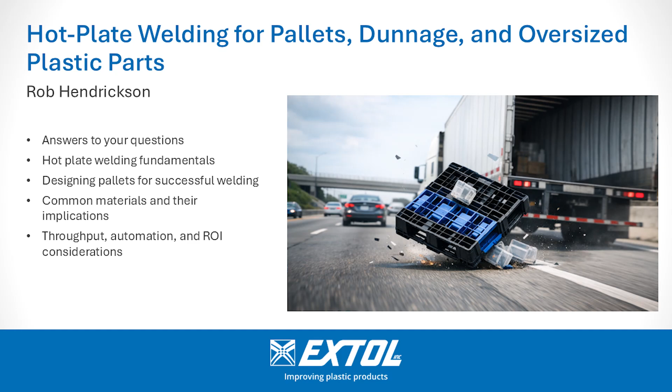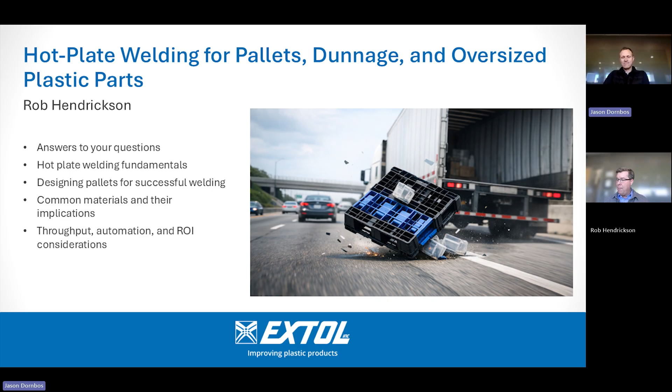So first question was, why did you sign up? Second question was, what type of pallets or dunnage or totes do you deal with? This one, maybe A, B, C, D, E, F, if you want to answer this one.

What kind of manufacturing process do you use to make pallets? There's a lot of different ones out there. Generally, like a single shot injection mold, there may not be welding on that. There may be, but maybe in a specific application.

There's the two-shot injection mold, which we're going to talk quite a bit about because that's primarily what we do when you see the most volume. We've been seeing a little bit of growth in the area of twin thermoformed sheets because I think they offer a little bit more impact resistance when dealing with that. The thing is, they don't always offer the opportunity to have a raised rib for you to weld on.

We also look at an injection molded base with an extruded top, and maybe you're doing some hot plate welding, maybe something else. Please let us know if you have something there. Otherwise, we're going to try to run the gamut and cover those things.

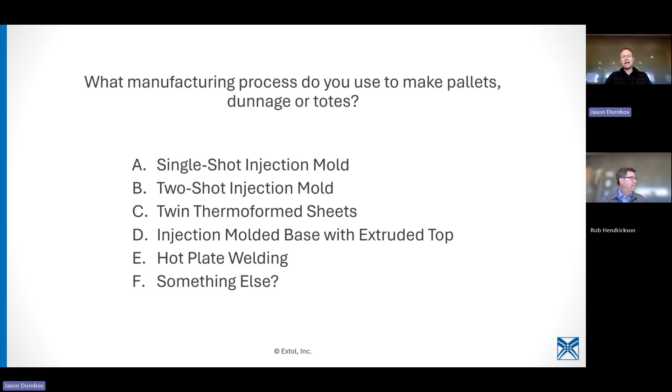Sounds great. So I'd like to talk a little bit about why Extol. When you look at plastic welding, that's our sole focus, right? Plastic welding and joining, and we'll talk about that. Comes in a couple different shapes and forms. We'll also talk about what that looks like when we discuss those different applications that we've looked at.

There's pallet welding, which is that two-piece injection molded piece that we look at. We've done bin extension, so when you have a bin and you want to add some height to that, there's also been pallet extension. We've looked at some bin extensions on a lateral approach too, but then there's also tote reinforcement. So sometimes you may have a standard tote that you're making and you want to reinforce that bottom because it's got heavier materials being transported in it. That's another way we look at welding for those different types.

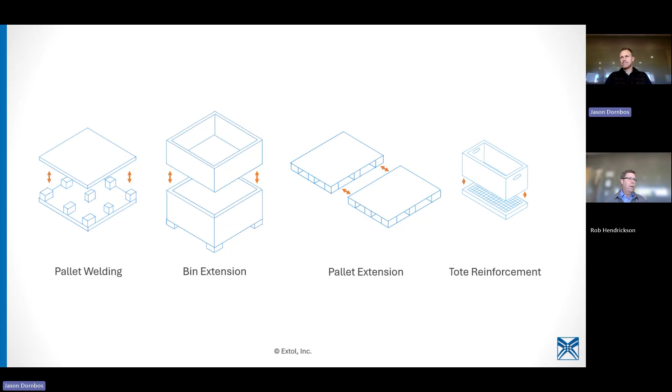And you might have something else that you've got, so I encourage you to talk about that. Again, as I said, Extol solves complex plastic manufacturing challenges, and that X in the logo on the side talks a little bit about our approach. We really focus on plastic welding expertise. At the core, that's what we do.

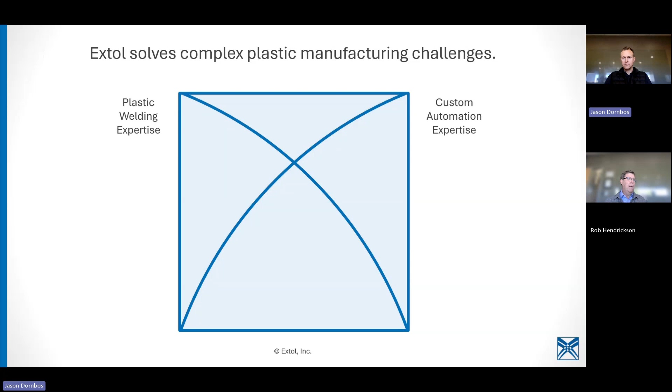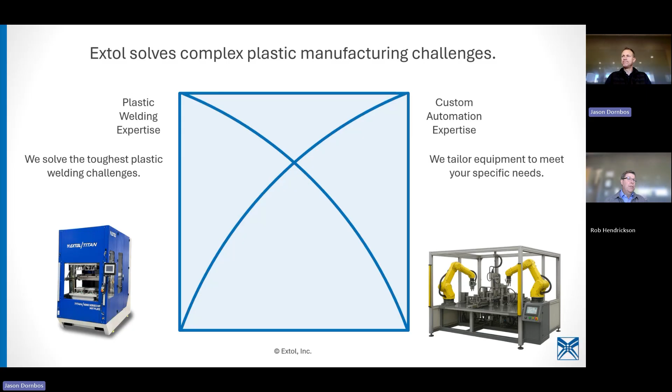We also have expertise when it comes to custom automation, but really the value you get is we've got a standard piece of equipment. When we need to solve those tough plastic challenges, we've probably got a piece of equipment and we've definitely got a process that we can take you through to figure that out. When you look at equipment, we can custom tailor that equipment if it doesn't fit inside a standard hot plate welder like this one here on the left. So we can do that piece. Really what Extol does is we don't make you compromise, right? We give you the best of both worlds when we're working with that. And our approach is kind of threefold.

We got a quick question from Ted: can heat welding create an airtight or watertight barrier? Great question, absolutely. A lot of different welding methods can create a hermetic seal, something that's airtight or watertight. And hot plate welding is definitely one of those.

So we'll quickly talk through some of these areas that Extol specializes in. Our engineering services group, think of us like an extension of your engineering team. We can help you with development. We can kind of guide you through the process of adopting plastic welding into your manufacturing processes.

So we can help you with prototyping, validation. We'll do a design of experiments, whatever you need, and we'll guide you through that process.

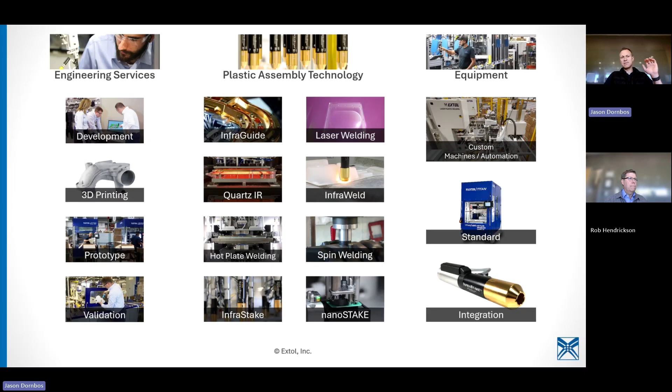I'm going to quickly touch on the different plastic assembly technologies we offer. They split into two categories: welding technologies and staking technologies. Welding means taking two plastic materials and getting them to bond at the molecular level. Staking is a mechanical joint, where we heat a post and form it to capture some mating component. It's mechanical retention, so it doesn't require material compatibility. You can stake plastic to something other than plastic, like metal, paper, leather, or printed circuit boards.

But today we're really going to focus mostly on welding. I'll quickly give a high level overview of some of these different technologies.

A few of them use infrared energy. InfraGuide is focused infrared energy. Quartz IR is a more broad-based infrared, where we take a mask to block off areas of a part where we don't want heat. Laser welding is a very focused single wavelength of infrared energy that we trace around a part to get the weld. InfraWeld is a focused spot weld that does through-transmission with IR.

The main focus of today would be hot plate welding. Essentially, you have a heated tool and you're touching plastic to that. The last one I glossed over is spin welding: you spin one component relative to the other, apply pressure, and the friction of that spinning motion causes the plastic to heat up.

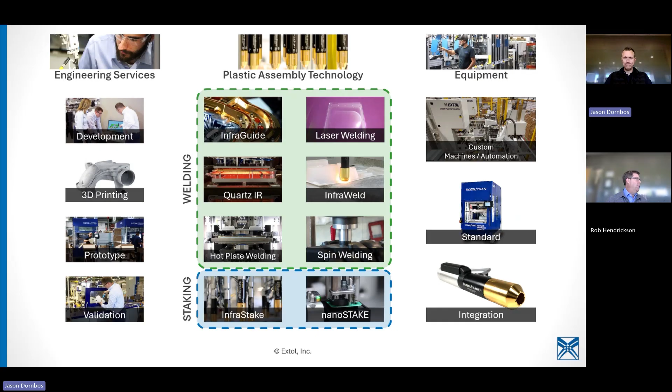So we're going to talk a little bit about hot plate welding, starting right there. We'll cover what it is, how it works, what the benefits are, where it's used, how to design for it, and what the equipment looks like. Then we'll talk about how some of the other technologies can operate in that same equipment and why we might use those as an alternative.

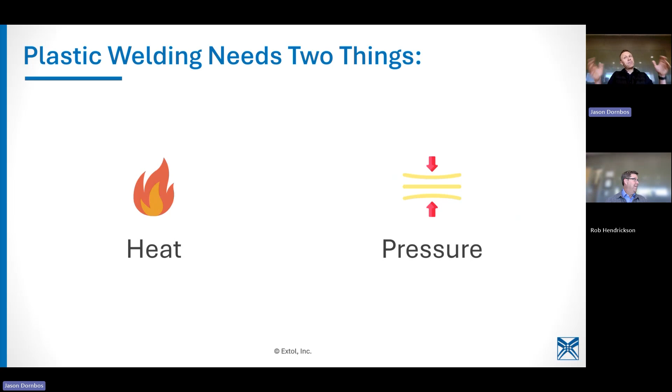So plastic welding — pretty simple, you need two things: heat and pressure. That's it. There are lots of different ways to apply that, as we saw in the overview of the different welding technologies, but it comes down to heat and pressure. So what is hot plate welding?

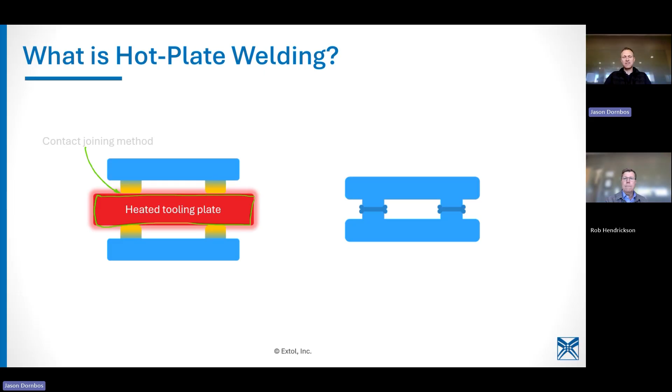It's a contact joining method — we're actually touching the plastic to a heated tool. Here's your heated tooling plate, represented by that little red rectangle. It's hot, and we can control the temperature. When we touch onto it, conduction from the heated tool goes into the plastic parts. Once things are heated up sufficiently and you bring them together, you get strong, leak-proof welds.

Yes, they are strong, airtight, and watertight. We talked about welding some of those bins—one application was a vertical extension where they were actually putting fluid inside. Absolutely, we can get that to work even in that large scale type of application. If you put a bunch of fluid inside a Dunnage-sized bin, there's a lot of pressure involved, so it's got to be able to hold a lot of pressure.

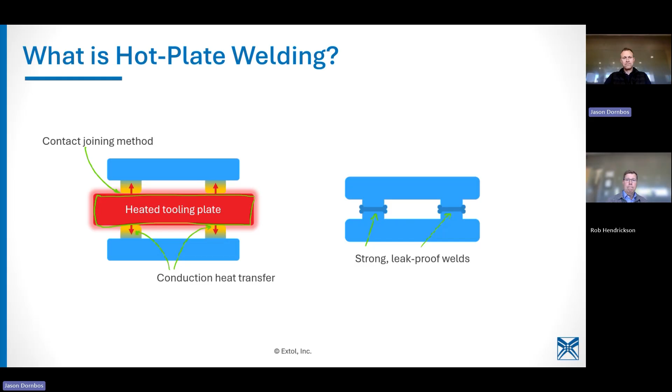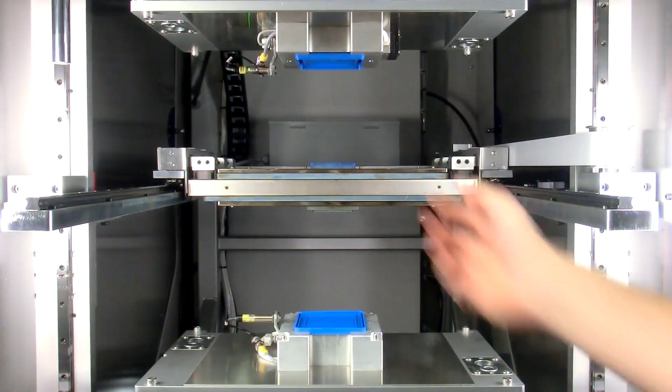Here's a quick video showing what the hot plate welding process looks like. This isn't a pallet, much smaller than a pallet, but it illustrates the process. This is a polypropylene part. The heated tool is probably around 800 degrees Fahrenheit, giving a quick melt time because of the high temperature. Then this is the seal phase, where we push those plastic parts together to get a bond.

I saw somebody start typing. Did you have a question? Feel free to ask it whenever you'd like.

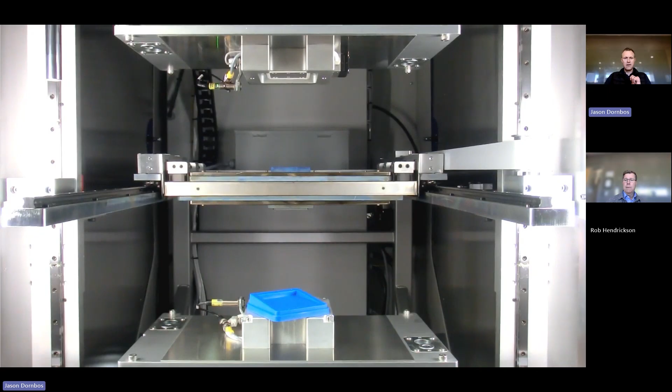How can you ensure the weld will hold up to impact from pallet jacks? That's a good question. What we typically do is tensile testing, to make sure the weld is really, really strong. With hot plate welding, you can typically expect anywhere between 80 to 100% strength in the joint, compared to the parent molded material.

Often we have people design the weld rib width to be a bit wider than the wall thickness of the rest of the part. That way, if your weld strength is more in the 90 to 95% range, the extra thickness in the rib gets you to 100% strength. So if the wall thickness is strong enough to survive the impact, the weld joint should be too. Most of the time when we do strength testing on plastic welded parts, the joint doesn't fail—somewhere else on the part breaks apart, the parent material.

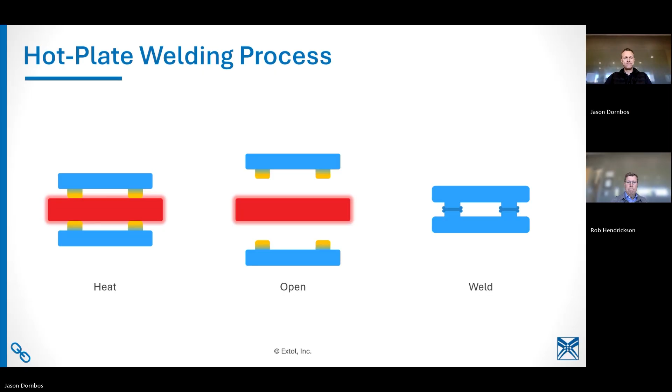Here's a quick overview of the hot plate welding process. Like we saw in the previous video, you apply heat by touching the plastic to the tool. There's an open phase in between where the heated tool gets out of the way, and then a weld phase, sometimes called the seal phase, where we bring the parts together, applying controlled pressure to get them to bond. Then that's the cooling phase—get it in contact, let it start to cool, and then move on.

There are lots of different parameters here, but some of the main ones are controlling the temperature, the depth, and how long you're in contact with the heated tool—that affects how much heat you're putting in. Then there's the seal or weld phase, where we control the depth, how far we're pushing the parts into each other, the forces used, and how long we're holding it. Those are the pressure parameters that matter most.

I see Mike typing. I don't want to jump too far ahead—he's got a long one, this could be a long question. That's good, we'll let him keep typing.

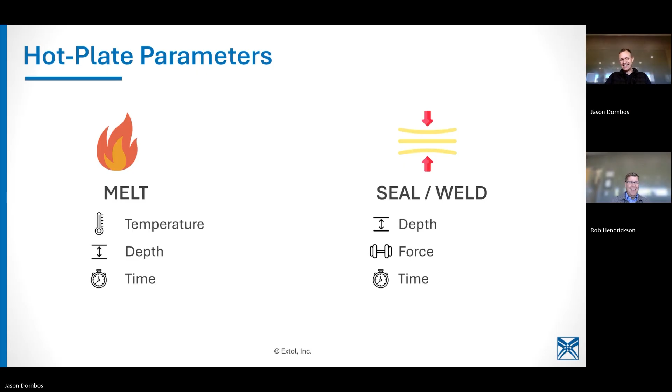Benefits of hot plate welding: welds are strong, as we discussed, you can get basically parent material strength. It's leak proof, so it'll hold water, air, and lots of other fluids—doesn't have to be water. It's also free of particulate. Other processes that join plastic parts, usually friction-based ones, can generate particulate—plastic fibers and loose particles coming off the weld joint. That's not an issue for some applications, but in others you need a cleaner assembly, and particulate is a bad thing. Hot plate welding doesn't have any particulate.

Generally speaking, because of the molecular exchange that's happening, hot plate welding is really the strongest weld you can get. Yeah, it really is a very strong, robust weld.

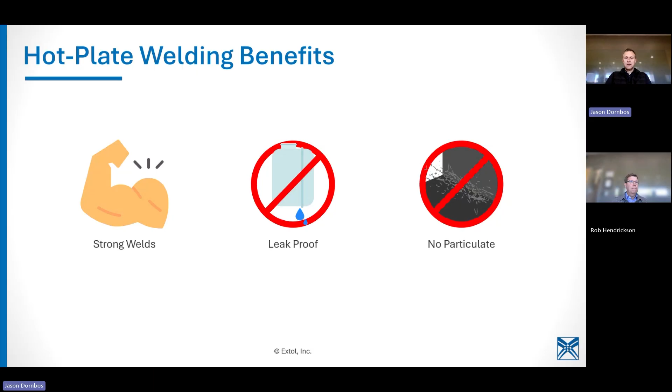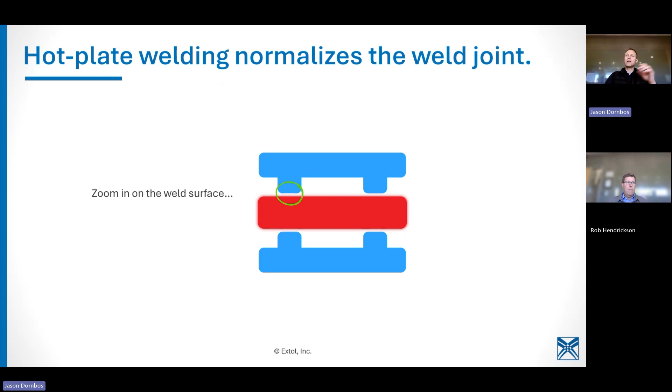One of my favorite things about hot plate welding is that it normalizes the weld joint. This explains why we're able to get strong parts and hermetically sealed joints. If you look close at a plastic joint or part, they aren't actually flat. There's always warp or inconsistencies that deviate from the designed part in CAD. So how do we deal with that?

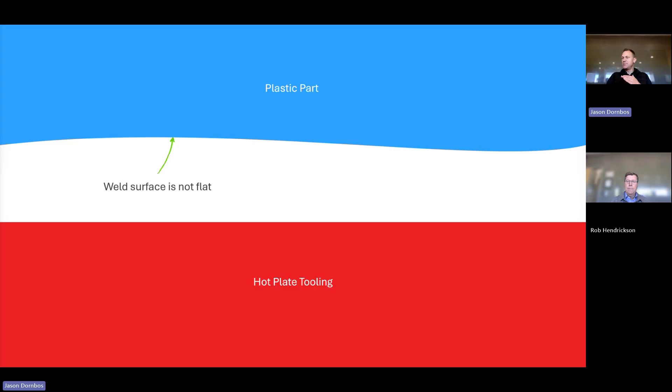The hot plate tooling can be machined to be very flat. So in hot plate welding, you use the hot tooling to normalize or flatten the weld surface, on both sides. What you end up with are two parallel surfaces that are flat and ready to be joined. There's no high spots, no low spots. So when we bring these two surfaces together, the pressure applied to the joint is evenly distributed along the entire weld surface, so you're getting strength everywhere and leak proof everywhere.

Mike has a question there. You want to take that one, Jason?

Is there a way to simulate via FEA or similar process the rackable strength load carrying ability of a welded pallet? There might be, but I'm not sure exactly how you'd go about doing that. I think you'd have to make some assumptions as to what kind of strength the actual joint is seeing.

That's a good question, Mike. I'm not quite sure the answer. I know we have not done FEA on a welded pallet. We do some estimates of strength, then I usually apply a safety factor, and we back that up with testing parts, actually physically welding them and doing tensile weld tests. We take a segment of that and do a tensile test on it to give an idea of what that strength is. But I don't know that we've done that specifically for rackable strength.

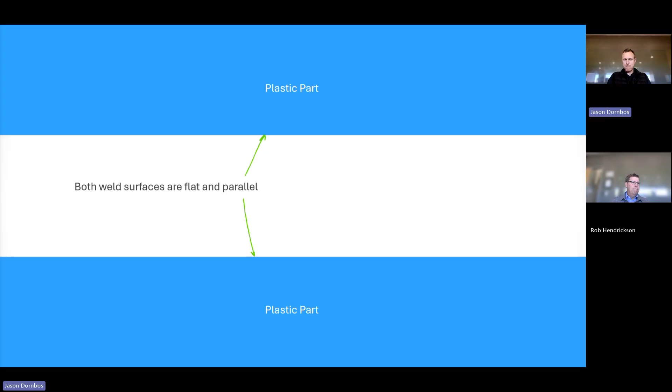Wait for him to type. He's typing. Good, well keep going here, Jason. We'll pause. He's got our attention. You got our attention, Mike. Bring it on, love the questions.

Agreed on the rod insertion, just wanting to avoid this if possible. Well, what I can say is welding plastic parts will never increase beyond the strength of the original material. You can't get 105% parent material strength, you can only get 100%, that's the max. So if plastic is going to bow under the weight of the load of whatever's inside it, you've reached the limit of what the plastic can do, and then you've got to do some other reinforcement, whether that's more plastic reinforcement ribs inside, or inserting other materials that are better at bend strength.

I can also understand your point on the rod insertion and wanting to avoid that, because down the road it does affect the way you can regrind that pallet if you want to make that more sustainable. You've got to disassemble first, and it's hard to disassemble those, they're kind of complicated.

Great question, Mike, thanks very much for that one. Common materials we're looking at are really polypro and HDPE. Sometimes people put fillers in that, with glass or talc, but we've done both of those. We'll talk a little bit later about temperatures too. With polypropylene, you could go with a little bit higher temperature, but when you're dealing with HDPE, you're really going to have a Teflon coated tool. People don't like to necessarily coat the tools with Teflon, but you've got to approach it at a lower temperature, and you've also got to worry about a little stickiness with that.

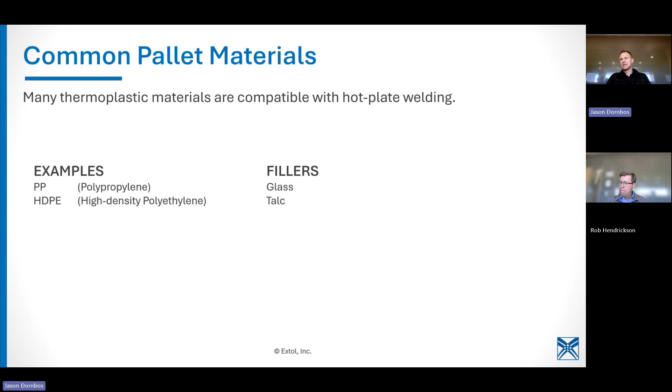I'm curious if there's any materials that I'm not familiar with, maybe Rob's familiar with, that you're using in your plastic pallets that are not polypropylene or HDPE.

Let us know. This is a good way to talk about hot plate welding and how this works and the transfer of energy in the various phases. But we're also going to talk a little bit about IR and the differences between them.

Jason, let's talk about this here. One of the biggest differences between using hot plate welding and IR welding is material displacement - how much material do you need in your weld joint or in your plastic that's going to get moved out of the way?

So with hot plate, when you reach the melt phase, we're displacing some of that material - we're melting some of it away. What you see on the screen in orange, if you look at this area, the little yellow area is showing that material was there, but now it's been pushed out of the way by the heated tool. You'd get like a little ball of plastic on either side of the weld rib.

Then you go to the open phase, that shaded yellow area still not there in the joint, and then you come together in the weld phase, and now we're squeezing out even more material. So the total displacement here is a fairly significant portion. For something like a pallet, you're probably going to displace 2-3 millimeters, maybe more, of material just because it's a large part.

And as we talked about, with hot plate you're normalizing that weld surface. So if you've got a lot of inconsistencies in the surface of your part, we have to melt all of those away, and so we get a lot of displacement to achieve an even total melt on the whole surface.

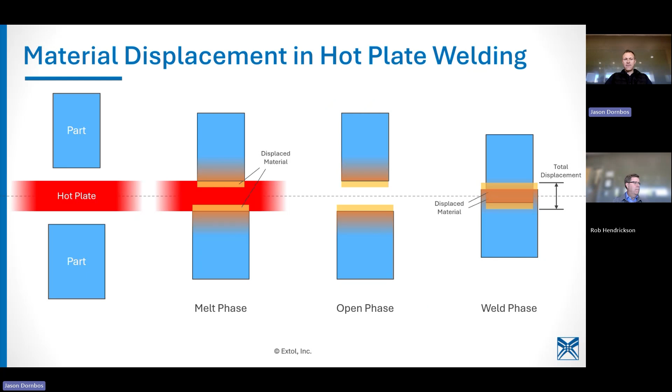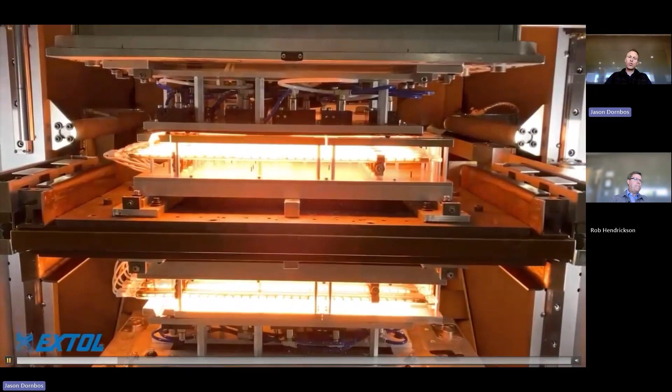So how does that differ from IR? Let's quick show a video of what infrared welding looks like. So you can kind of see, once it lights up, you can see there's all these quartz bulbs that are emitting that infrared energy.

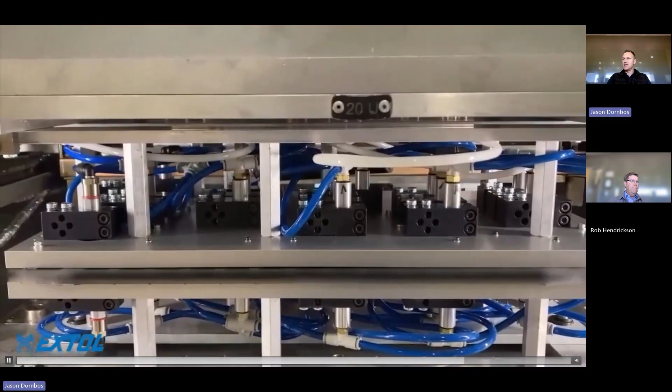And then in the middle here, this area, that is the mask. That is a piece of tooling that is designed to block some of the infrared energy from getting to the plastic part. That way we try to direct it on that weld rib. Exactly. And this is blurred out for customer confidentiality, but you can imagine what that would look like on your pallet.

So Jason, why would somebody want to go to an IR option instead of a hot plate option? There's two main reasons I could see. One is you're trying to reduce the amount of displacement, the amount of material that you're displacing. But the second reason, and maybe the bigger reason, is sticking issues. If you're having trouble with the plastic from your pallet sticking to a heated tool, then the best way to get rid of that is to not touch it with a heated tool.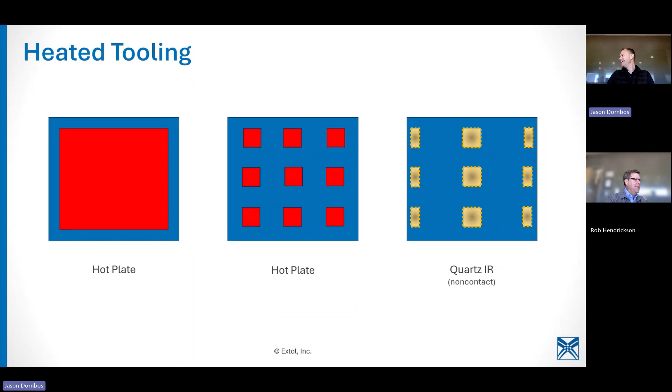In hot plate welding, the one on the far left where the whole surface is a hot plate, a hot tool, that's doable. If you were to do a pallet-sized quartz IR for something like that, you'd have to call your local power company and say, I need a new power generator right next to our building. And we'd introduce you to some of our friends in the energy storage industry.

Good question. And it looks like Ted's got another one coming up, but let's keep moving here because we're at 11:25. We promised these people they could have their lives back at 11:45. Yes, we've got 20 minutes to get through this.

All right, so there's lots of different hot plate welding equipment that Extol produces. We produce anything from small modular welders made for welding smaller components, to our standard Titan series welder. How many of those do we have? Yeah, we've got probably 260 of those that we have sold. That's really where Extol is known for this.

I mean, we've got some of those that have 3 million cycles on them, and they just keep going. And the interchangeability of this, I think with the Titan, one of the things we've done too - this probably applies to some of the tote conversation, Jason - is the way we've designed that is so you could actually easily integrate it. You could do a traditional front load on that with an operator load, or we could move off that front and put it in a manufacturing line with a conveyor coming through to pick up those parts. So it gives us some flexibility.

And then the jumbo is really when people came to us and said, hey, there were some other people making hot plate welders for pallet welding - some European providers, some domestic providers that were really more automation people doing it. And people said, hey, you know about plastic joining, what can you do for us? So we've produced multiples of this. We actually have one in our manufacturing facility right now that we're doing. And they come in a couple different options, and we'll talk about those in a minute.

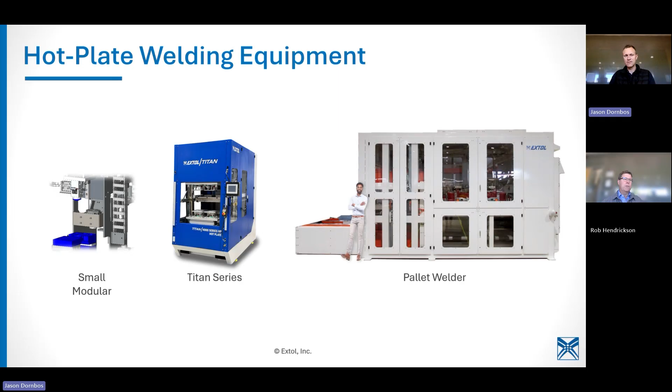This is where Jason's really going to start to geek out. This is where I'm going to nerd out. Graphics and stuff, I like this part. So buckle up, we'll get into this.

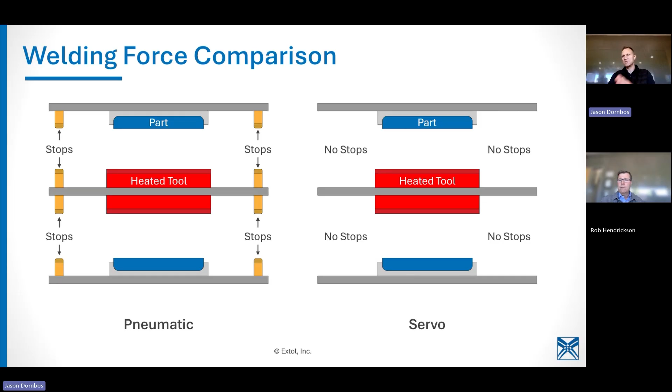With pallet, it says pneumatic, but pneumatic or hydraulic is kind of what we're talking about. I know with the pressures needed for pallet welding, often it's a hydraulic machine. But the main difference here would be: pneumatic and hydraulic welders need hard stops to control the motions of your press. There are stops that you have to mechanically, physically set, and you can adjust the height of those. On a servo welder, there's no stops. So let's look at what happens in your weld process with a welder that has stops versus one that does not. When you come to the melt phase, you have a hard stop to control the height of your part as it presses into the hot tool.

But how do you know that the whole weld surface is melted? With a servo-driven welder, we get feedback from the servo motor that we can calculate forces from. You can put a limit around the amount of force needed to get to your programmed melt position. If that force falls off or goes really high, outside of the window you know gives you good parts, then you know there's an issue. Maybe you have a short shot, or a part that had extra material flashed over on it.

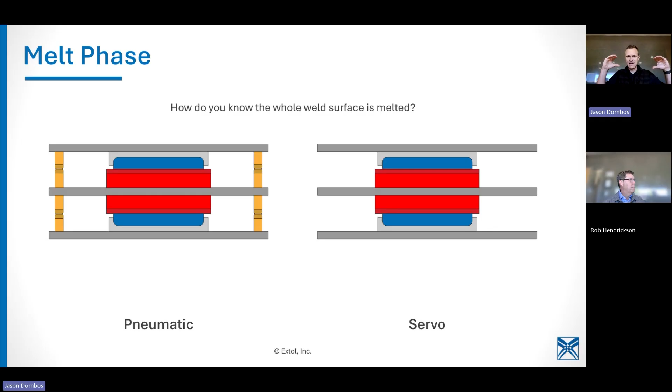Whereas a pneumatic welder, you don't get that feedback. If there's a short shot, it's going to go and hit the hard stops, and then it might not melt all of your part.

Could be a problem. When you go to the open phase, a welder with stops needs to open all the way before you can get your heated tool out of the way. Things move slower in a pneumatic or hydraulic machine. With a servo welder, you can program it to open just slightly, just enough to be safe, and then get that heated tool out of the way quickly because servo motors move fast.

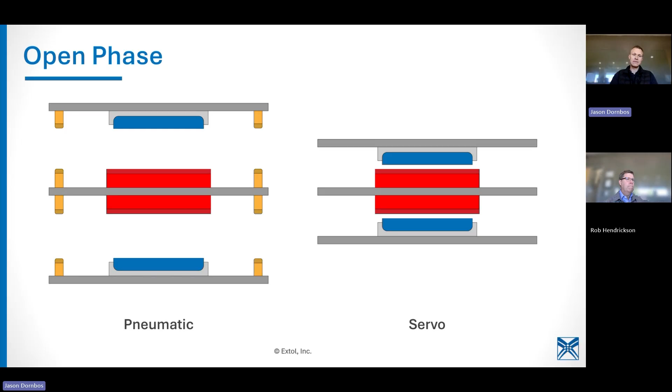And then the weld phase. The question here is how much force is going into the weld joint? As we said earlier, heat and pressure. So how much pressure are you applying to the part? With a welder with stops, you're applying that force, but some of it's going into the weld and some into the hard stops. How much is going into the part? You don't know, there's really no way to know. You're applying force, but if all of that force is going into your hard stops, then the part's not seeing any of it.

With a servo-driven welder, 100% of the force applied by the servo motor goes into the plastic part, so you have control. Are you able to weld parts with a pneumatic or hydraulic welder? Yes. Is it a controlled, easy to understand process? No. But with a servo welder, you can.

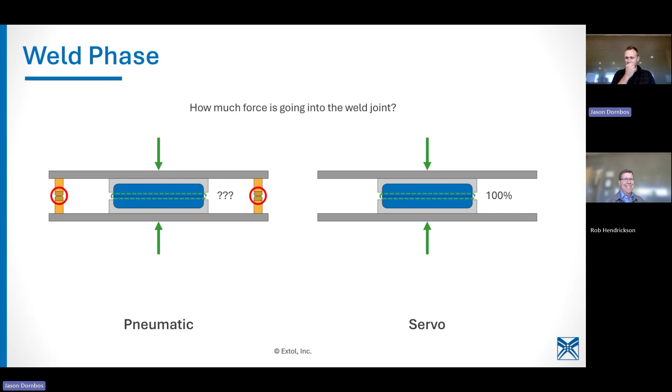So here's the summary. Pneumatic and hydraulic welders use stops. You can use electronic pressure regulators, and it's great for simple, small parts. But with servo, you get no hard stops, precision control, and fast cycle times. It's great for large, complex parts, and it's what we choose to go with for pallet welding.

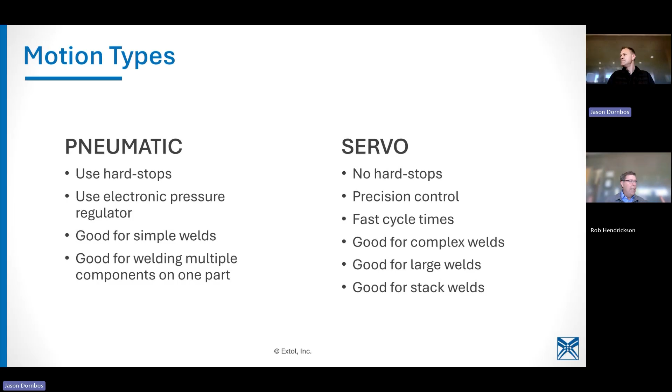And when you look at our pallet welders, it's kind of shocking. As I went out there, I was thinking it really was only 4 servos, but it's actually a 7 servo welder, with primary and secondary servos in it. There are 3 for the horizontal motion, and 4 for the vertical motion. Each of those platens has 2 servos on it, which makes sure you get good, uniform pressure when you're putting those parts together. And we know that's critical to the weld.

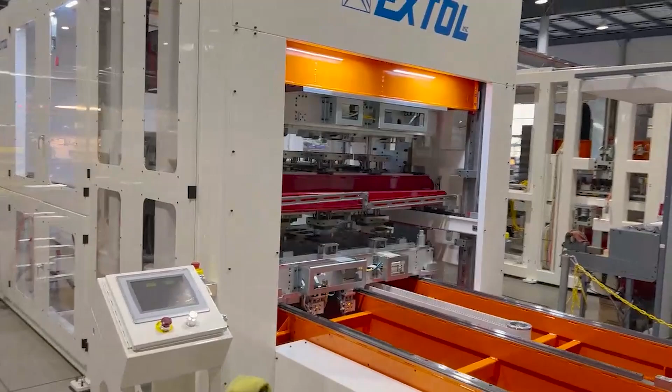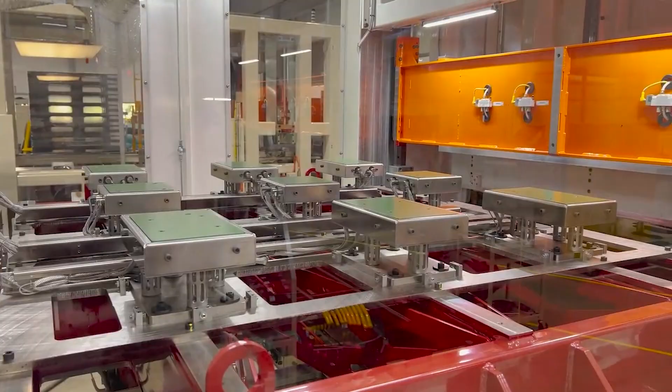So let's keep going here, Jason. Here's a video, we're not showing the part, pallet, spoiler alert, so you can see how it moves around. The video pans around the machine so you get a sense of the scale of it, and then as we pan in here, those are the heated pucks doing the melting on your part.

And so that green is the Teflon right on top of that, right? Yep. So here's a full dry cycle where we're doing a part pickup.

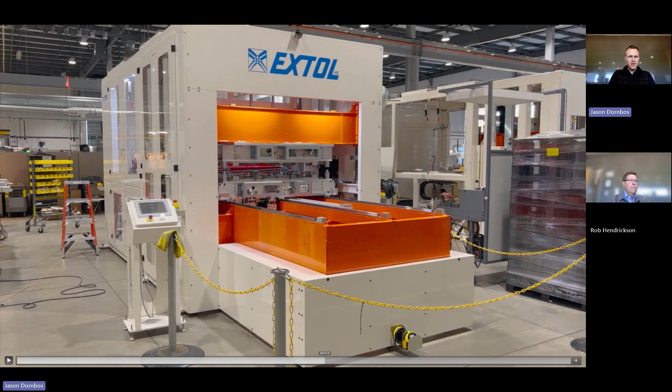So actually, I'm going to pause it real quick and back up. This part's important, that the lower tooling, what this welder was built for, is we're loading onto that lower tooling, and by having it stick out of the machine, it's way easier for reach. Whether you have an operator putting these in, maybe two operators, trying to reach inside of a machine to load a pallet would be really difficult. So this is helpful for either manual load or a robot load where the robot reach can't get inside the machine very well. This is a front load and front unload application.

And then when you're done, that welded pallet comes up the front, as Rob's saying. Okay.

So, yeah, we've done many of these machines. Like I said, we've got over 260 hot plate welders out there in the marketplace. So not just pallet welding, but it is something we do. That's what Extol is.

We're usually running about less than 1% scrap on these. I think that scrap, like Jason said before, usually there's something involved in that, a short shot or something like that.

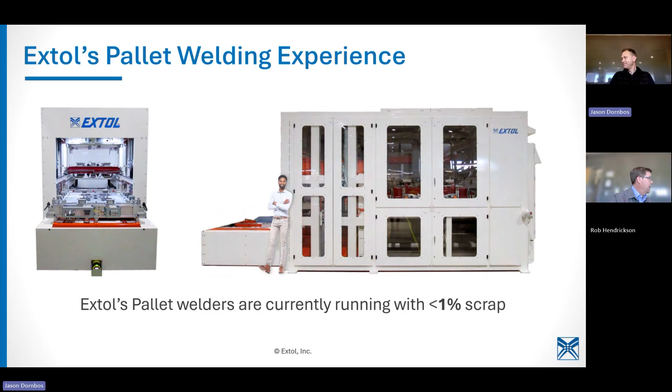But when you look at increased throughput, this is a 4-axis servo system, which is usually what we have on some of those applications. This other one we're going to talk about is a 7-axis. It's going to have a very durable 6x6 steel tubular frame.

We've also designed it with flexibility in mind for changing those tools out. It's got a door that opens at the top. You can actually remove it from the side too, but it's a lot easier just to hook it up to a crane, lift it out the top, and take that back out. So we can configure that for future flexibility.

And you can weld lots of different pallet designs all with one piece of capital equipment.

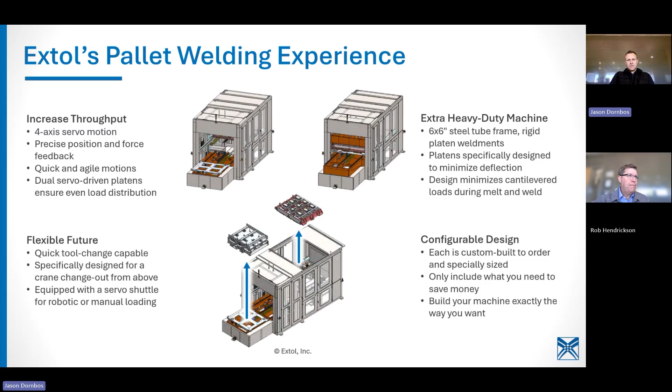Precise process control. With servo, I've touted how much control we have. What we really, really care about, how you tune your weld and optimize it, is heat and pressure. So in the melt and open phases, the melt phase, we're controlling how much heat is going into the weld. The open phase is how much heat we're losing, so we want to minimize that. And then in the seal phase, how much pressure is going into the weld.

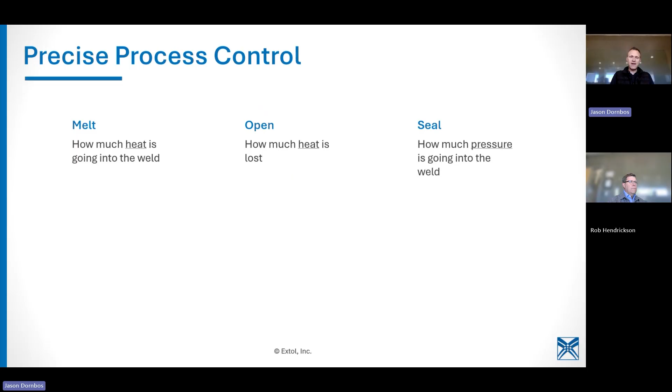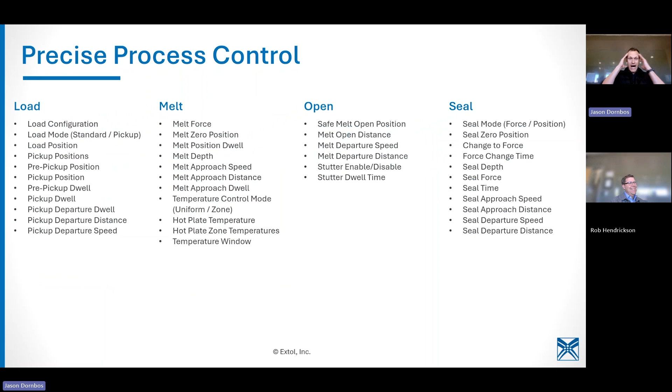So what kind of parameters does Extol's welder give you? A whole bunch of them. I did this because I wanted you to feel a little bit overwhelmed, like wow, that's a lot of parameters. But don't worry, because this doesn't even show them all. There's also pass-fail criteria, little windows of what's good, what's bad, around a lot of these. So you get control over your weld process.

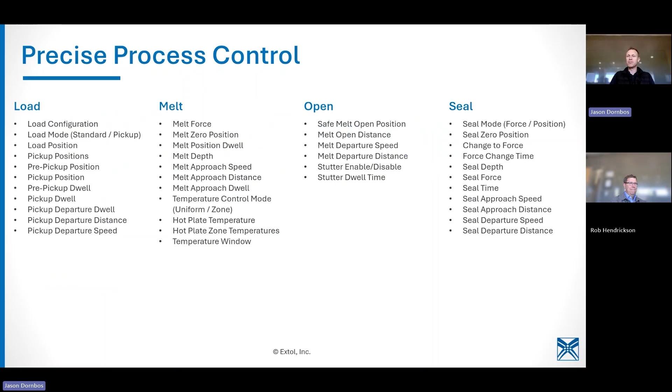But what really matters is a few parameters. These are the ones that actually make a big difference on the strength and quality of your parts. All of these other parameters, yes, need to be set, and of course there's defaults. But Extol, as Rob said, Extol develops the recipe for you.

So you come to Extol to do the runoff on your equipment, and we've got this thing ready to go. We weld parts, and then when we ship it to your facility, we make sure we come down with the machine and make sure it's going to weld parts correctly there. So whether that means you have warm parts from a molding process and we need to tweak some of the parameters, we help you with that.

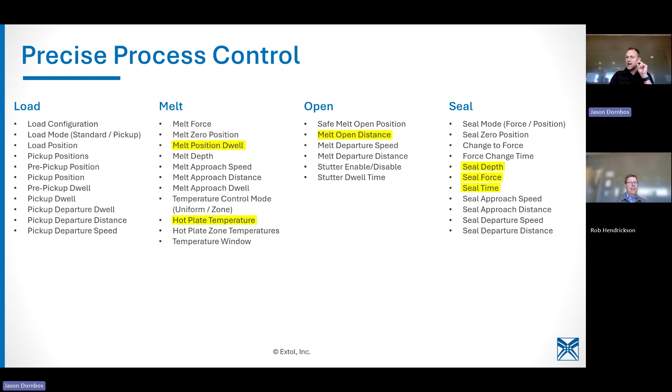So you don't have to get overwhelmed by, oh my goodness, there's a lot of parameters. Yes, there are, but this gives you the control to tweak every single thing that might need to be tweaked. Great summary.

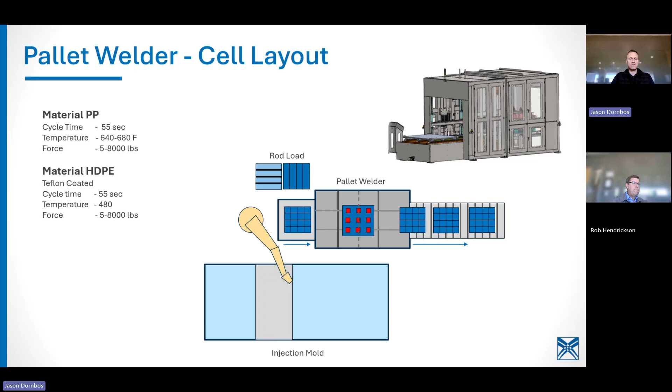Mike asked, what's the most common puck material for polypropylene? Both of these would use typically a steel puck or plate, depending on the configuration. So you're using steel for the actual heated tooling, and then the coating for polypropylene, you can go with Teflon based, but you'd have to limit the amount of temperature because Teflon starts to break down around 550-600 degrees Fahrenheit. If you're going to weld at the elevated temperature, then we would go with more of a chromium-based coating, which is a very hard, robust coating capable of withstanding super elevated temperatures, well above the 680 degrees Fahrenheit that we typically would use.

So one of the other inquiries we've had from people is, hey, we've got a pallet, we'd like to actually extend it horizontally. Well, what can we do with that? We've talked about it basically - I don't have an image of it here, but we basically take that hot plate and put it on a vertical.

So we would be welding - you could take this. Generally these pallets get cut, right, and then they get welded together. So you'd probably do a quick cut right there and a quick cut right there, and then Shazam, you weld it together. Obviously you guys need to be worried about what the structure is going to be like underneath that.

That is something that we can do. We've done complex vertical welders - I think probably what I saw most was for center consoles in automobiles. So with a pallet, the welder is probably a lot simpler because I wouldn't expect it to have all these crazy complex geometries. It's a very straight weld typically. So we can do that.

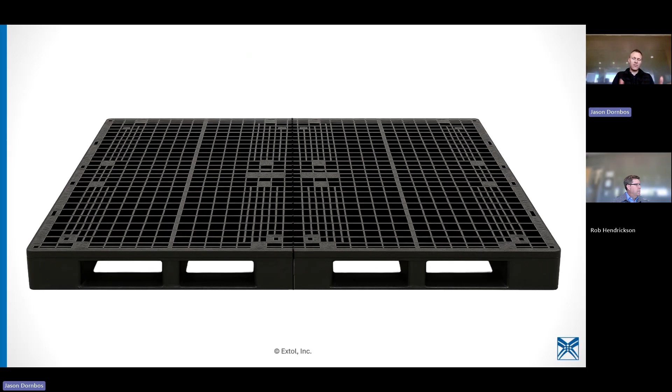We can do that for totes as well, if that's something needed. Generally these aren't high volumes when you're doing those type of things, but if it is something that you need to look at, then that's certainly something we can help you out with - that customization piece. It allows you to be a custom provider of pallets, so if your customer is asking for a certain size, if you have the ability to cut and weld together, you can hit whatever dimension your customer's looking for.

So we're coming up on our time schedule here. We talked about hot plate welding - how does it work, what are the benefits, when is it used, and how to design.

And what does the equipment look like? We also talked a little bit about IR. We didn't really get into bin welding so much, but if you have a bin you're dealing with, if it's large, or even a tote, we're also looking at other applications. We might be able to get a tote, depending on the size, into one of our standard hot plate welders. We just have to worry about the vertical clearance we can get those parts in, but that's not a problem. We do those types of things all the time.

We have done some bin extension work where you're increasing the height. The size of larger bins often necessitates a weld similar to the pallet one we were looking at. But that front load looks a little different, because you've got the large bin on the bottom and you're adding some height to the top.

Great point. Looks like Willis is typing something. What's your experience of parts produced via the low pressure structural foam molding process? Do you have the answer to that one? I don't have the answer to that one. Okay, Jason, so I guess Mike, if you could explain a little more for me.

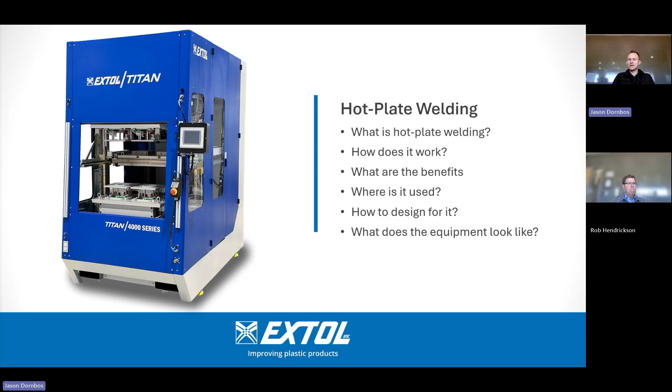I believe structural foam typically still has some more dense material on the edges. Is that correct? Would you be able to get a sacrificial rib molded into something like that? If so, if you can get a sacrificial rib onto that top surface, then hot plate welding should be doable. But once you get to the more porous part of the foam area, the amount of plastic available for welding, you'd probably struggle to get any kind of strength out of it.